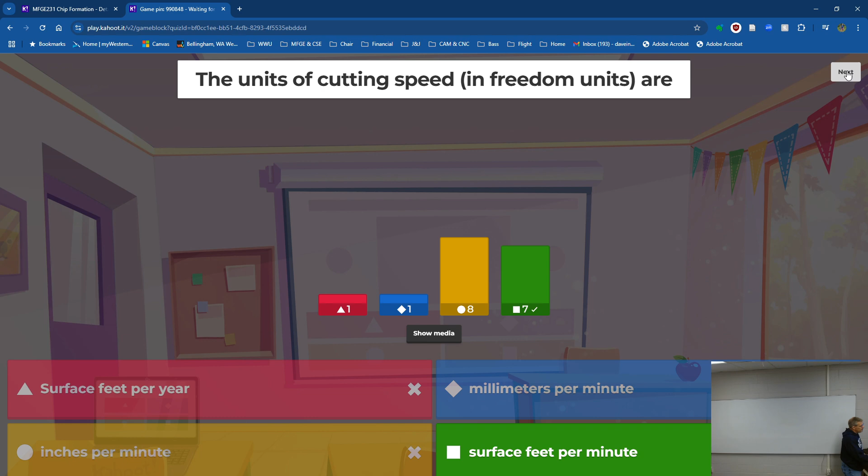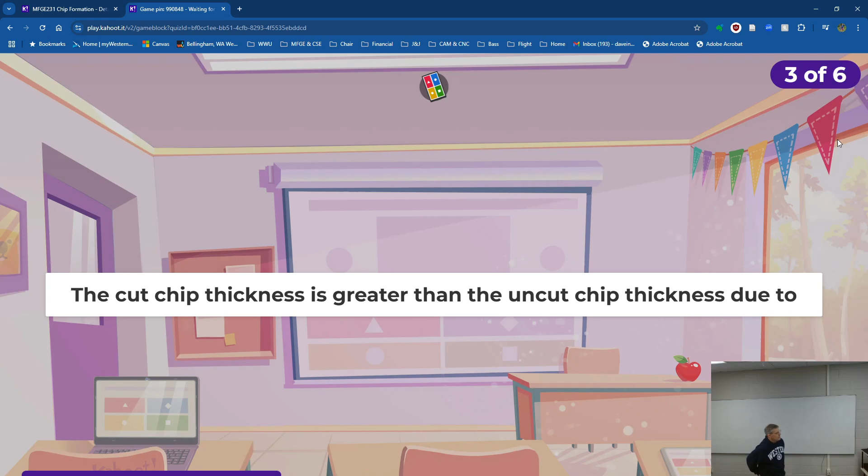I just know it's got to be constancy of volume. Excellent. Constancy of volume and friction. Good job, most everybody got there. Stress and shear angle is not a terrible answer, but not the best answer.

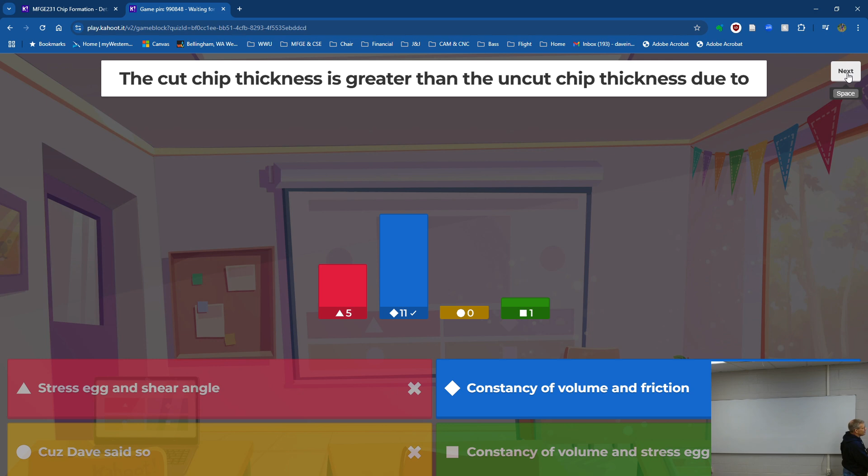In one way, they're not super related, but they all have exactly the same resultant, which is the important thing. They are all ways of trying to look at the resultant and to understand it differently.

All right, hanging on to a lead. False, for sure.

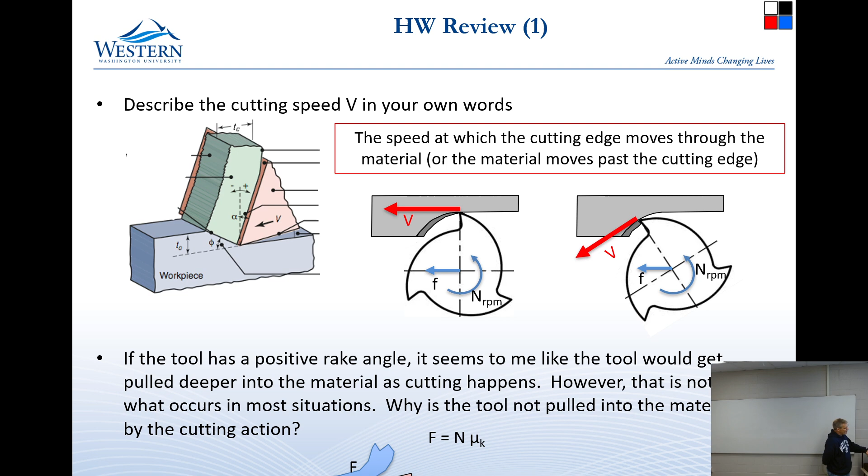That is excellent graphics, long after we needed them. But anyway, nice. Why is the shear plane important to machining, and how can we change it?

It's the plane across which all the work is being done. It's where the material is giving up, right here, and it is shearing across that area.

So how can we adjust it? If the shear plane is shorter, and you have the same amount of force, then there's more force being applied to that one area on the shear plane. So you might adjust parameters based on how long your shear plane is, so you don't end up with too much force on it.

Yes, but I don't like the word force there, that's a little bit not quite right. Does it have something to do with the amount of energy you're putting into cutting it? So I'm putting force onto this, and energy is force times distance. The force is kind of constant, not really, but we'll say it is for a moment. And if I stand this shear angle up so it is shorter, then I have force times a shorter distance, that's less energy into the workpiece, so that's less heat.

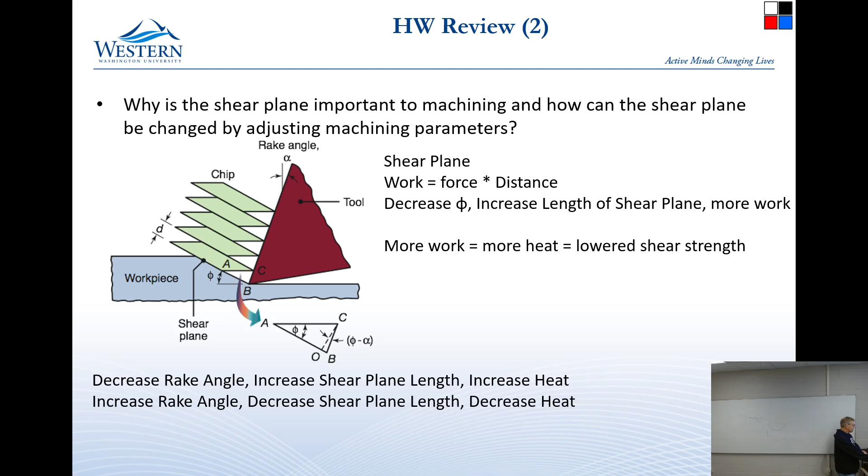All right. Nice. Words. Okay.

Merchant's force circle. Here is the point: there is a resultant force in a cutting process. The tool is either applying a force to the part, and the part is giving an equal and opposite force to the tool. So we have this resultant force, and we can break it up a lot of ways. That's the whole point of Merchant's force circle.

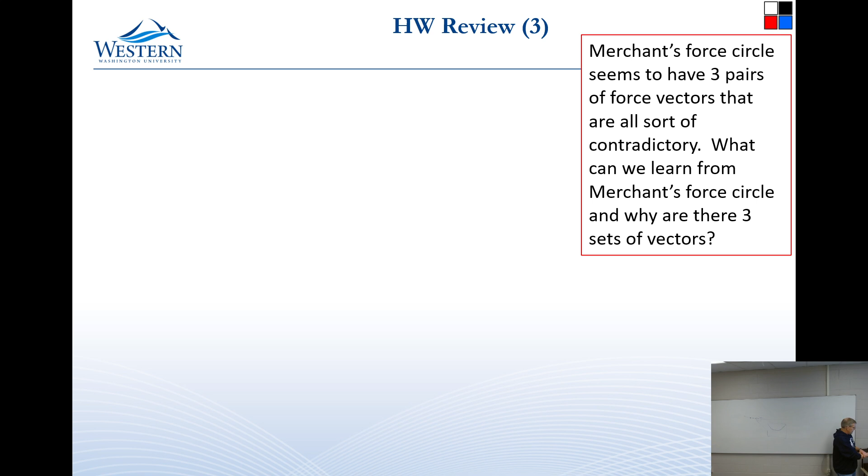So how might we break it up? Well, we can break it up into the cutting and thrust forces. The reason we use these is because they're convenient for machining. I have the tool, it is moving through the material, I set up the direction that it's moving through the material, I force that to happen, and so it's easy for me to think in terms of those axes. Other than that, they're not a particularly meaningful set of vectors to choose for this.

They don't have anything to do with the material. It's just that I can break it up into the cutting and thrust force, one pair of orthogonal vectors that sum to the resultant.

Now, it seems like the most useful or most meaningful pair, because this is where all the action is happening, would be the shear force and the normal to shear. But the problem is this changes all over the place. While I am cutting, there will be a little hard spot in the material, a soft spot in the material, the heat comes, the heat goes. It's constantly changing because the dynamics of the machining operation are constantly changing.

And until after the process, I have no idea what the shear angle was. We'll watch a video in a little bit where you can actually see the shear angle happening, but it is a terribly contrived thing to be able to see the shear angle occur. So that one is the most meaningful from a physics standpoint, but I can't actually tell what's going on during the process.

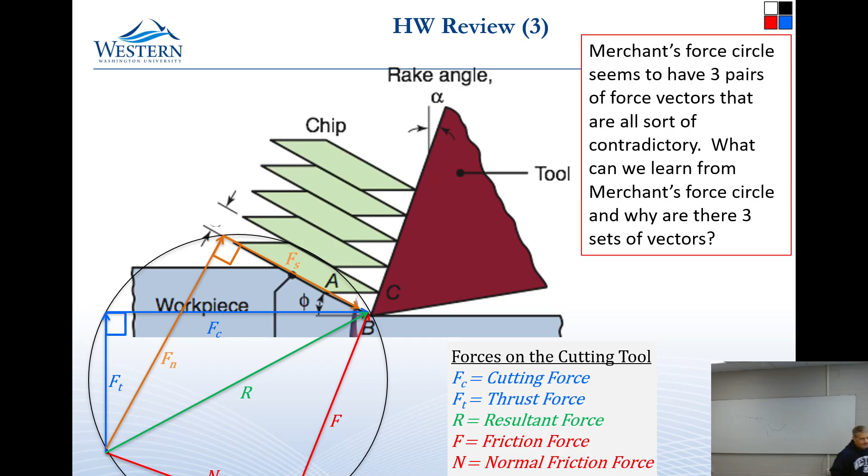So they're not unrelated, they're all the same resultant. So there's the shear force and the friction force, and those are not normal to each other? They are not normal to each other. It looks like they are in this drawing, which is a problem with the drawing, but when we watch it in a few minutes, you'll see that the shear angle changes all over the place, and we don't know that they're normal to each other. Gotcha, so we can't assume. We cannot. That would be nice. Darn physics. Never doing what we need.

All right, units of cutting speed: surface feet per minute. It is a funny set of units, very odd. But the numbers are huge—we'll be talking about something with 1,000 surface feet per minute. And that's feet, while all the other things are measured in inches or millimeters. So this one is a massive number in comparison with the others.

And that's why I said the other day that there's this weird intersection of things happening, and that is machining and nuclear explosions. It's because machining is happening so fast, it is deforming the material at this mind-numbing rate compared to other ways that we do anything with materials.

You can also get it if you're firing artillery at something. That's actually how you do these tests, with a thing called a gas gun. You take a little chunk of material that's very hard, and the material you want to test, and put it in a big long potato cannon - a scientific potato cannon, not the kind you spray hairspray in the back and light off with a barbecue lighter. This is a lot more specific than that.

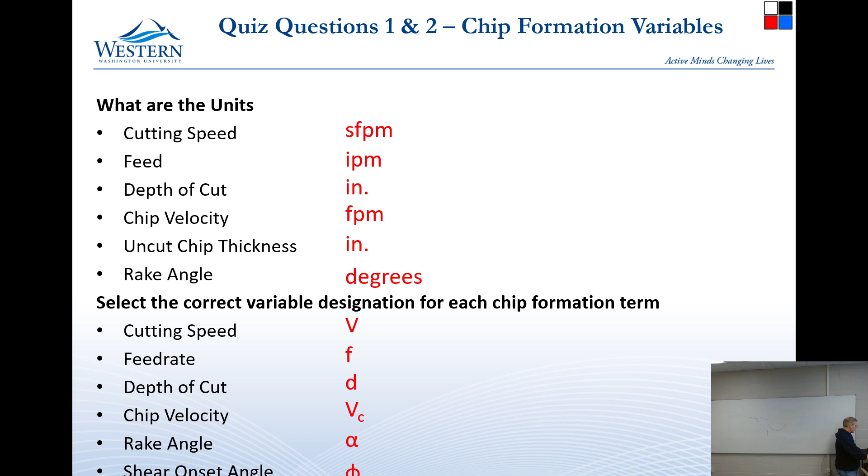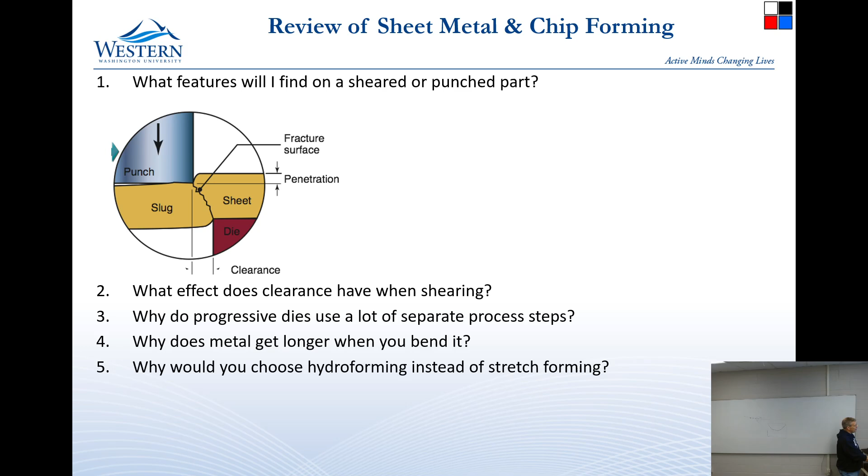Okay, so these are the things that we are setting and thinking about in our process. This question is about the lab today, so we can't say what we changed today because it hasn't happened yet. We're talking about that later.

That's important to know - positive, negative, and neutral rakes. That's like excellent work, right? Did you draw this? Of course I did - sweet graphics work right there. It is, I know.

You can't just find this kind of stuff on the internet. You have to make bad stuff like this. I'm sorry, I didn't recognize your artistry. Yeah, I remember how I did that.

Anyway, what is the difference between cutting speed and feed rate in an actual cutting process?

Yeah, your feed rate moves with your spindle speed and everything like that, because it has to be within a set parameter of chip load. Okay, so it is within a set parameter of chip load. We're determining how thick a chip we can take without overwhelming our machine.

But they seem really similar in a way. It's easy to get this confused, and the reason is because the directions sort of change on things. So I forgot my giant blue foam tool. That is terrible. But anyway, you should always have an end mill in every box that you carry around.

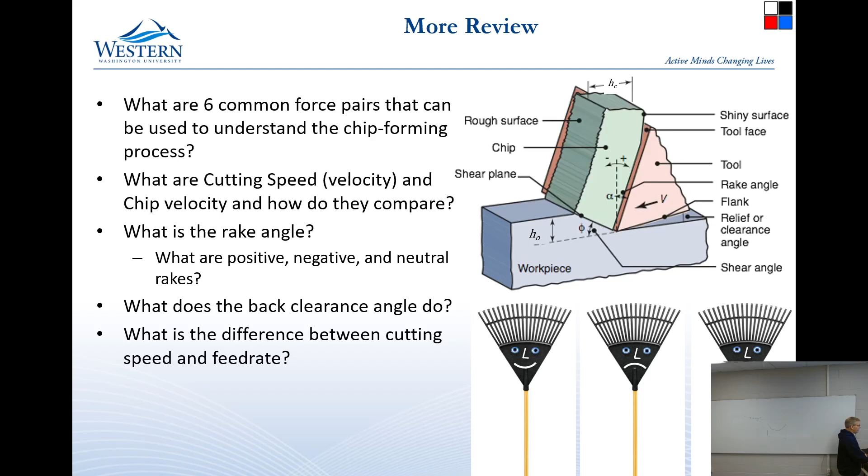If you look on the charts, that's too fast. It's okay, they'll all be fine. Nobody will die. So we get to watch a cool video.

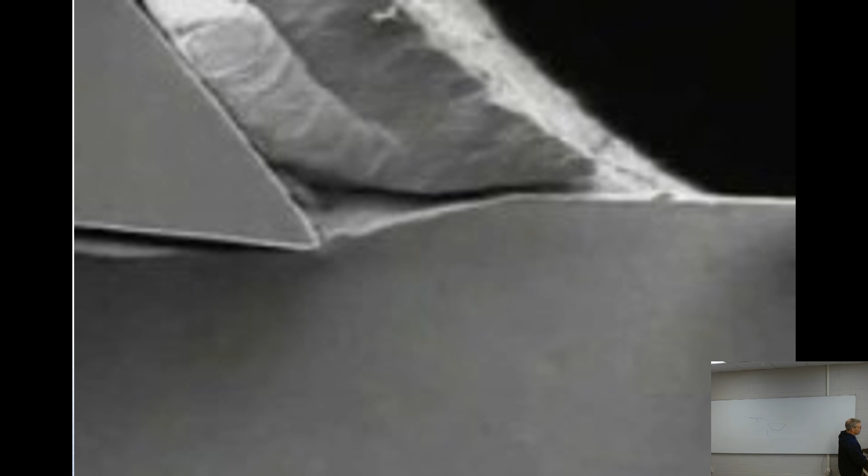We're actually going to watch it bigger. So, hey, stop. I said stop. Boy, you try to raise these computers well, and they just turn on you.

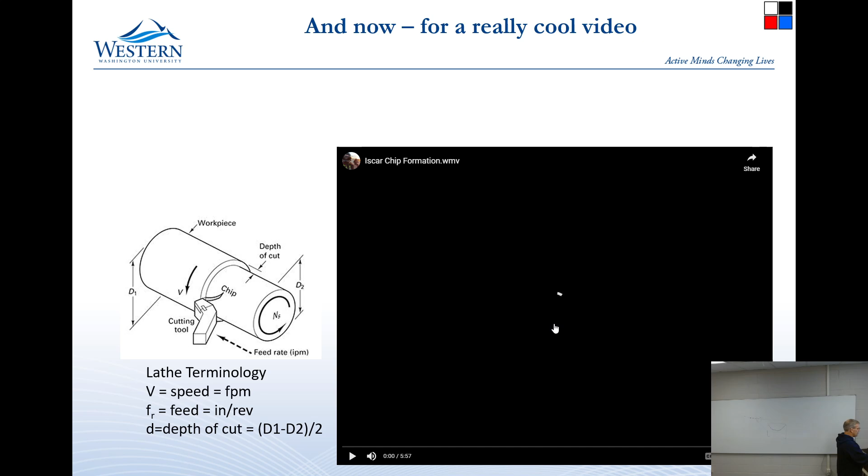All right, so just to understand what's happening here. Now I've confused it. All right, what is happening? We are acting like this is a lathe tool, and we have the material turning, and we are generating a chip right here as the tool comes, or the material comes across the tool and creates a chip.

Now that's not what actually is happening, because inside a scanning electron microscope, you can't make something spin very easily or very quickly. So what is actually happening is there is material, and it is being pushed through on a stage. Somebody's sitting there pushing the button on the stage, trying to feed it as fast as they possibly can, which if you've used the SEM is not very fast. And there's a tool mounted in there.

Now the thing that's been weird about this is that they took this piece of material and they polished the edge of it. You can tell they polished the edge because you can see some individual grains here, and a collection of some interstitials around the edge of the grains, which is kind of cool to see. And then they are running this tool through here, and it is kind of halfway sticking out of the part so that we can watch it.

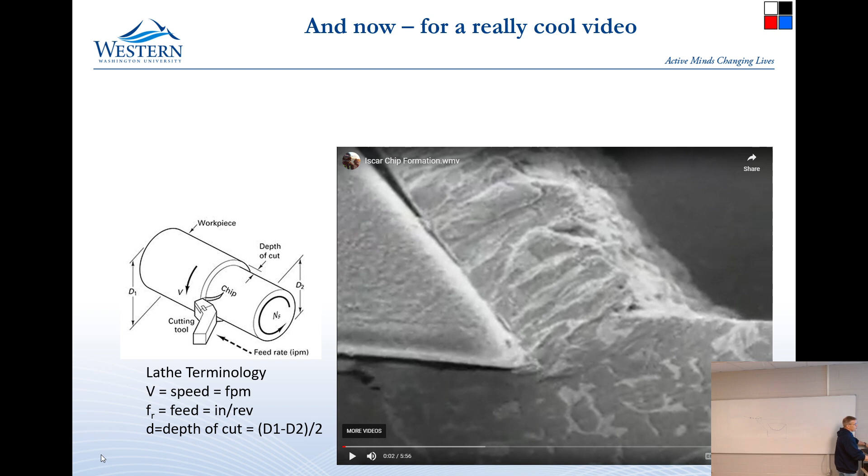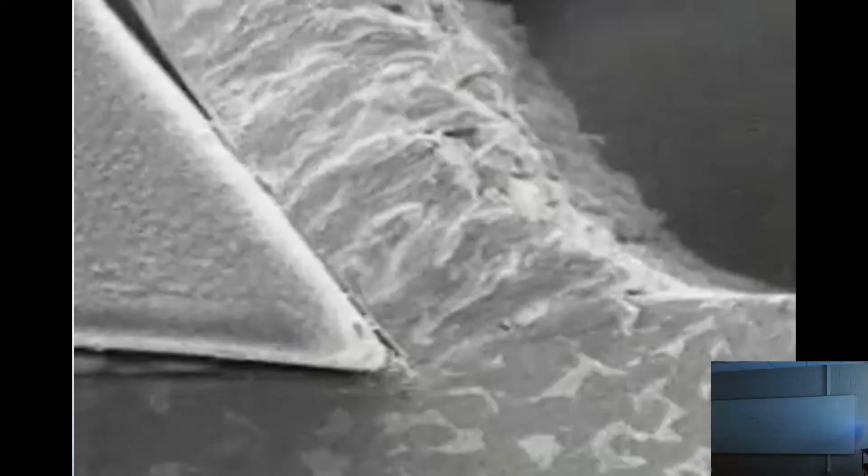All right, oops, sorry. Okay, so look along here. You can see the shear plane happening, and you can see that it varies some. It will be up here, and then it will go down here. Notice also what's happening at the tip of the tool: there's some material that's getting welded onto the tip of the tool.

And if we look at the tip, well, no, can't do that yet. You'll look at the tip later. One of the problems with built up edge is that the more it gets built up, it will sort of create a negative rake angle for machining the material.

Let's pause this for a minute, just because it's cool. So pretty sweet, right? You can see the shear events that happen. The material built up stress, and then it sheared along the plane, and it sheared over. Look at the difference between the uncut chip thickness, which is sort of like this, and the cut chip thickness, which is huge, massive. Pretty cool, pretty neat.

What else do we see? See anything else in there worth noting? So this is an uncoated tool. It's a high-speed steel tool, so should be fairly slippery. And you can actually make high-speed steel tools sharper than you can carbide tools, but we will use carbide mostly because they can go much faster.

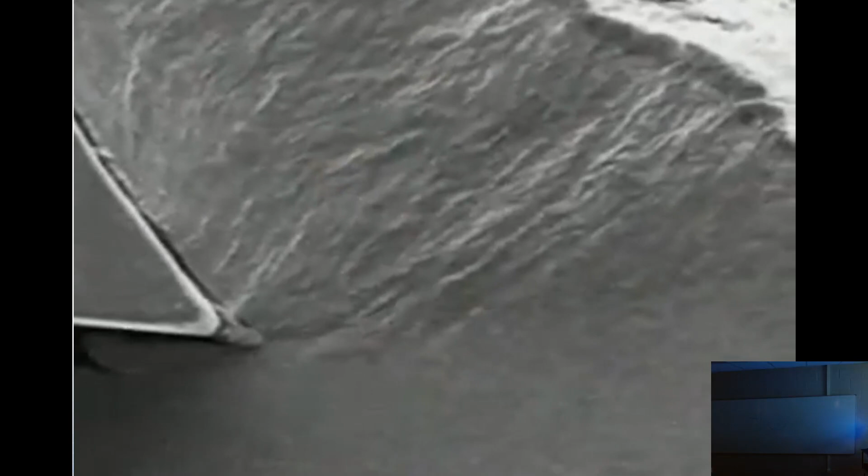So it's all looking good, and then, oh, look at these things. So that difference in height right there is surface roughness that comes out because of having the rake angle not be correct. So that's causing material to build up on this edge. It's also somewhat because this cutting process is so slow compared to what a cutting process ought to be, that the chip dynamics are kind of wacky.

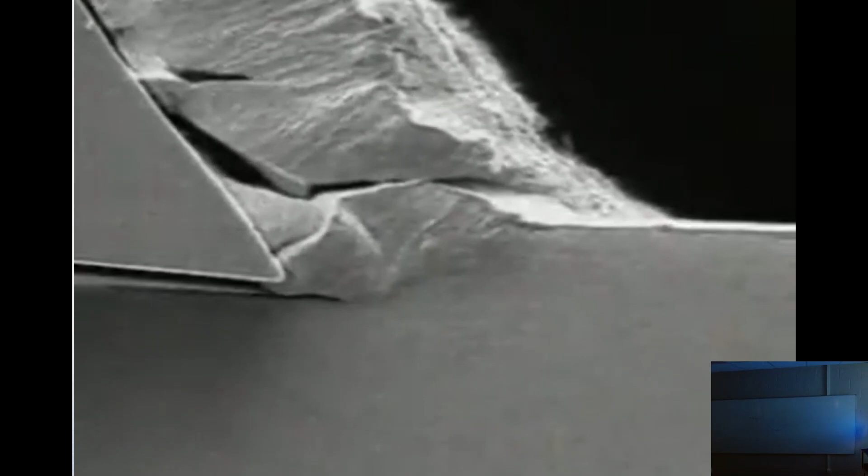Oh, that looks bad. It's going to be hard to recover from this one. We can look at the chips afterwards, and we'll look at chips in the next class. You can look at this morphology, the shape of the chips, and you can tell things about the process. So this is becoming serrated chips almost, where the chips are separate, breaking into pieces that are separate from each other.

We've now formed a completely new tool. We're not even using the tool anymore. So the tool wear has gone to zero at the tip.

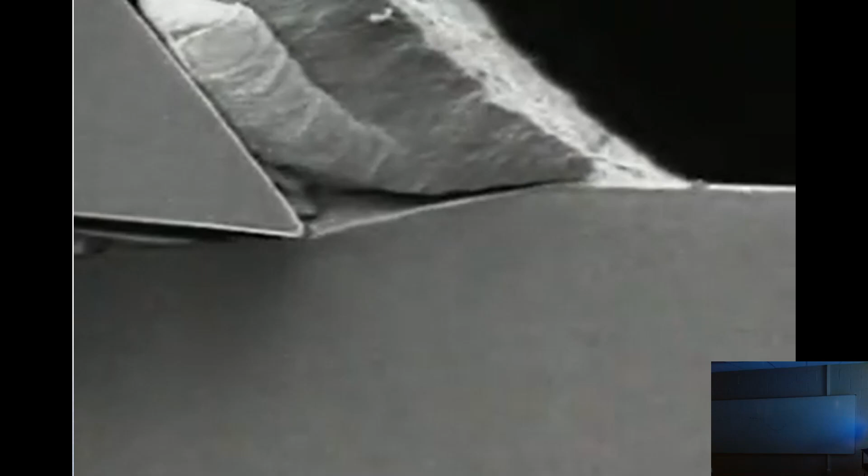Is that all welded? It is, but it'll break loose. Or is it like, where it makes like where it changes its height, is that buildup all welded, or is it just getting stuck under there? I would say it's hard to have a difference in definition. If it's stuck there, it's welded. So it's kind of a...

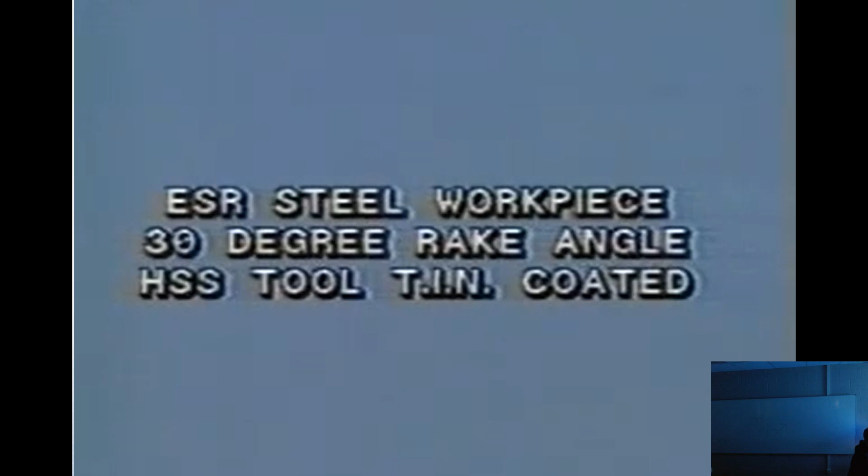Yeah, so this one, the tool has a coating on it. TiN is titanium nitride.

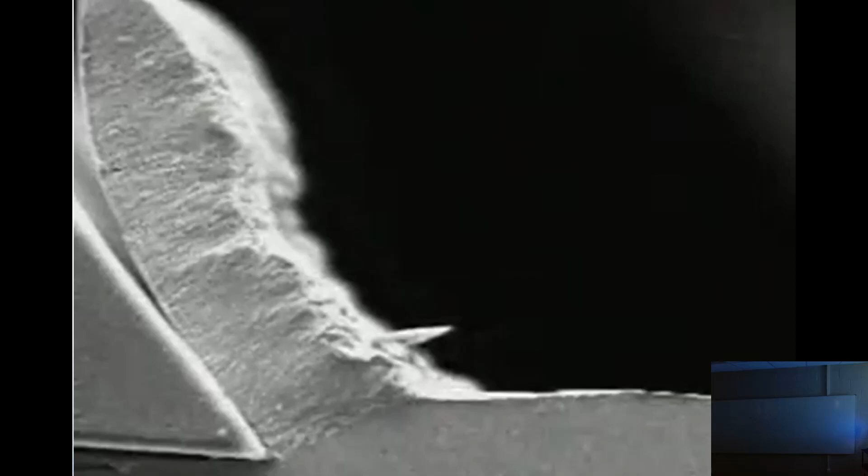Look how it rubs the tool right here. So there's high temperature right here as well as high temperature at the tip of the tool. If you have a good process, it will actually cause the material to bend away from the tool further up. What you want the chip to do is wrap around and hit itself in the back. When it hits itself in the back, it will break the chip loose. This is like a taffy experiment gone wrong.

This is way too much heat. Look how low the shear angle is going, way out from the edge. So we've got way too much heat in this process, and somewhat that's because the speed is all crazy on these. It's like plastic, it does look like plastic. We should call this plastic flow.

Perfect, good terminology. Unfortunately, no MERS were involved. No MERS.

What's happening? The tool's off to the left. It occasionally makes it into the picture. Why are they showing this? This is embarrassing, look how bad our tools are. Yeah, when operated at this speed in a vacuum, yes, they're not very good.

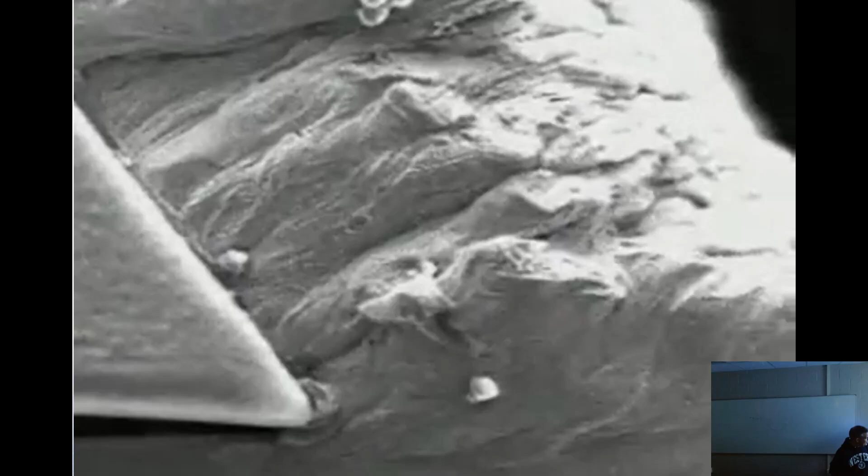Well, there's stuff in that one. There are, yeah, there are inclusions, which is part of machining - dealing with those inclusions. Because they'll hit a tool and break off the end, or all kinds of bad things.

A fish? I see it. Oh, swimming? Yeah, okay, I guess we can go with fish. Got a very pointy nose, this - well, fish. What do you see? I see a machine process, sorry.

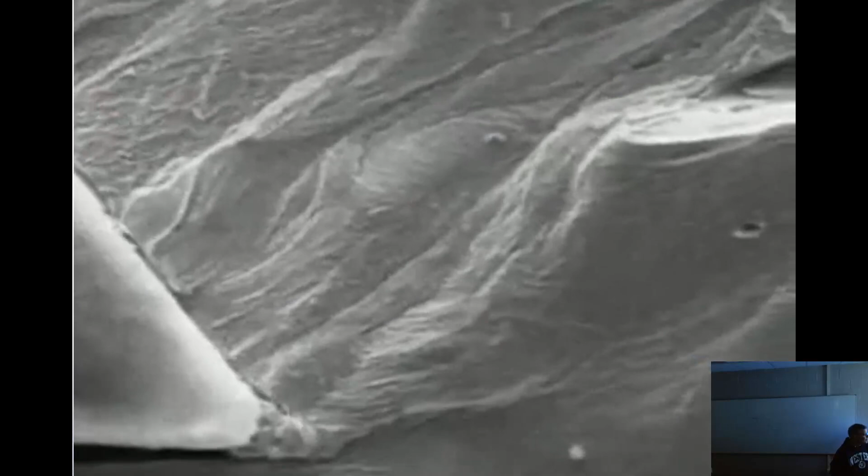Whoa, yeah, so you're gonna feel that on the surface. That would not be pretty on the surface of the material.

Right, here we go. Ooh, can we watch Microscopic Splinter? That one. By popular demand, we'll probably.

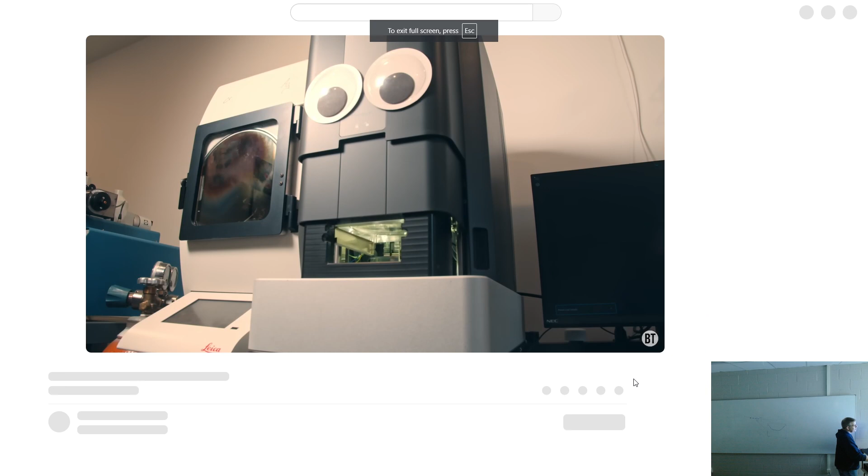I made this little widget, which is designed to cut metal, but it's designed to do that inside of a vacuum chamber of a scanning electron microscope, so that we can watch it happen in microscopic detail. And I have to tell you, this is some of the coolest footage I've seen in a long time.

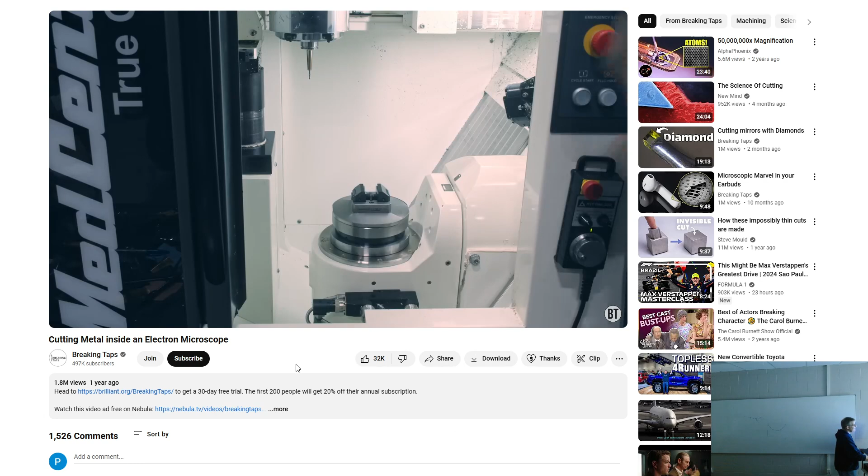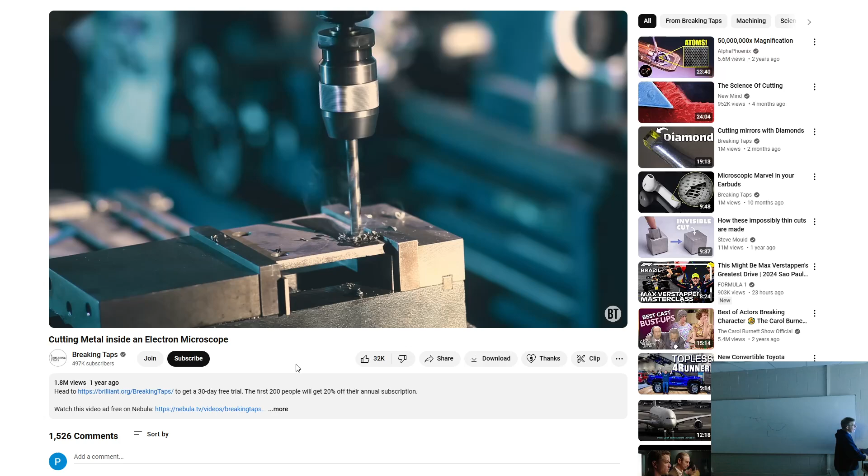Let's back up and talk about what's going on here. There are a lot of different ways to cut metal: small milling machines, fancy 5-axis CNCs, or even a drill press and hacksaw. Fundamentally, the principle is very simple. You take something harder than the metal, add a sharp edge to it, and push it through the metal. If everything goes well, you just cut some metal. Congrats! Of course, it's a little more complicated than that, but fundamentally, that's the idea.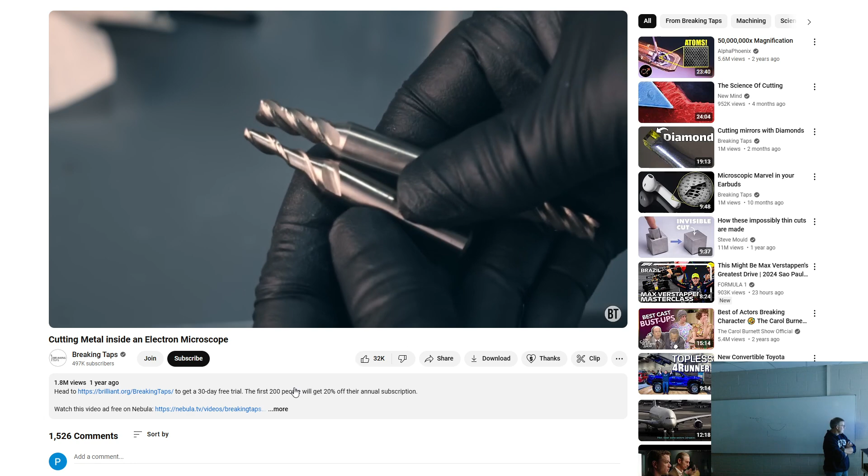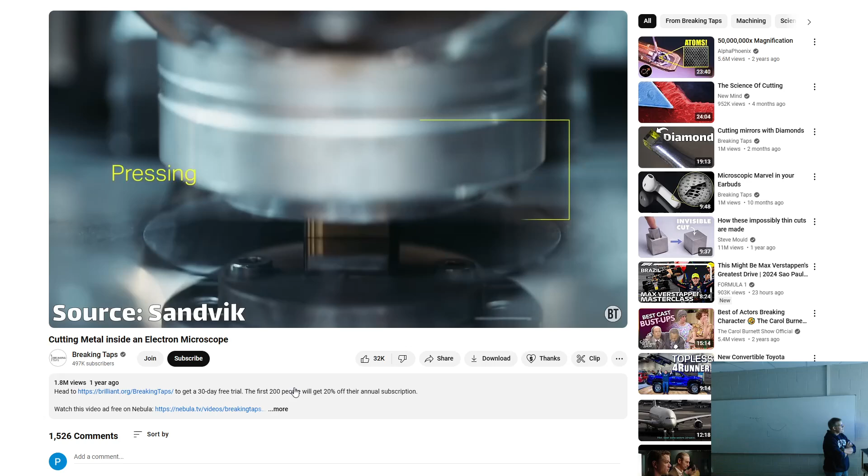Cutting tools were traditionally made of a hard metal called high-speed steel. It's an alloy that is harder than older carbon steels and lets you cut faster, hence the name high speed. But high-speed steel isn't generally used anymore because we have a better material called carbide. This is actually tungsten carbide powder mixed with cobalt binder. The powders are pressed together into a shape and then sintered. It makes a very hard tool that can keep a sharp edge.

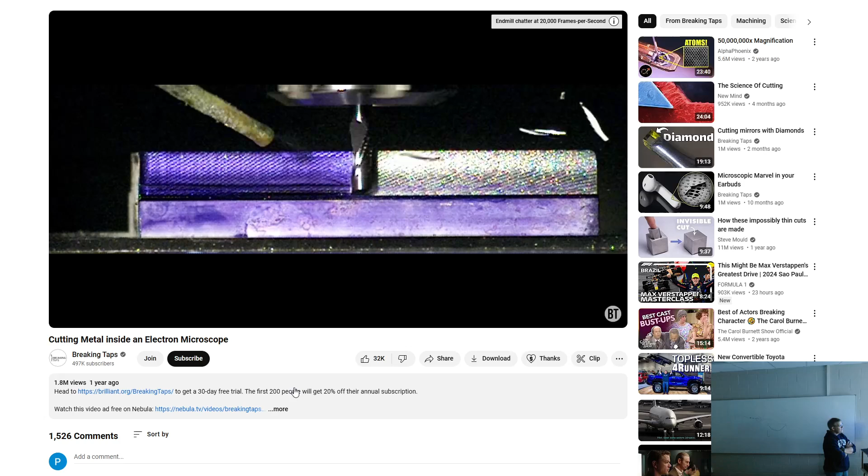Cutting tools come in all varieties, although the common form is a cylinder with sharp fluted edges. The sharp flutes cut the metal, and the space behind the flute helps remove the material from the cut and eject it. There are tons of variations of this - square edges or round edges, single flute or many flutes, super tiny or extra large, weird shapes, geometries that drill. Even though carbide is the most common, there are other materials too, like polycrystalline diamond or even single monocrystalline diamond. Sometimes the carbide is pressed into little shapes called inserts.

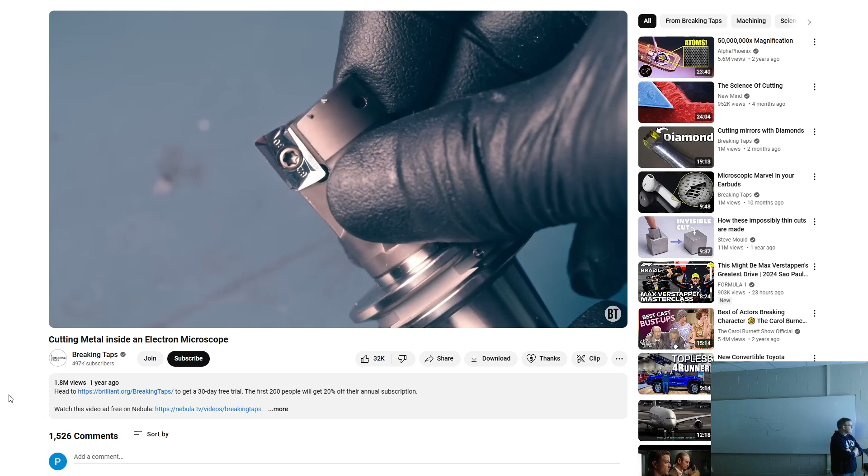That's what we're going to use today. These are 3 different cutting inserts, and you can see they all have slightly different shapes, coatings, and materials. These little differences can have a big impact on how they actually cut the metal. To help demonstrate this, I'm going to cut some clay using an improvised cutting device.

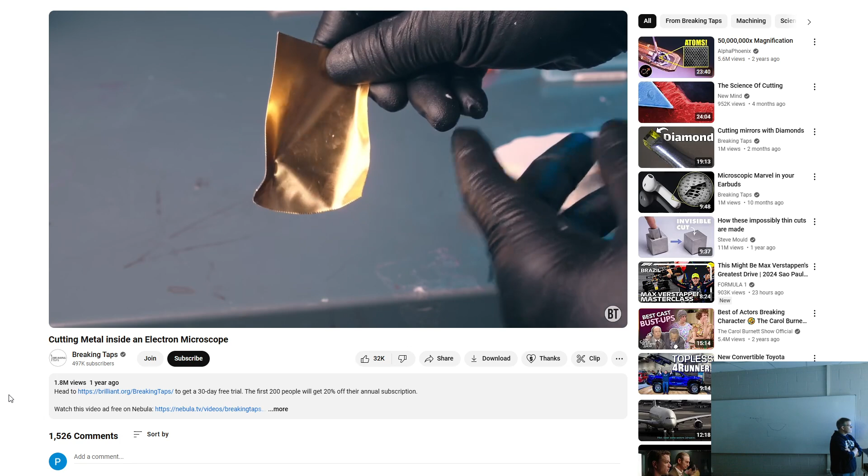It's just a piece of brass that I've bent into a specific shape. And while all these folds look random, they all serve a specific purpose. The cutting edge is down here at the bottom.

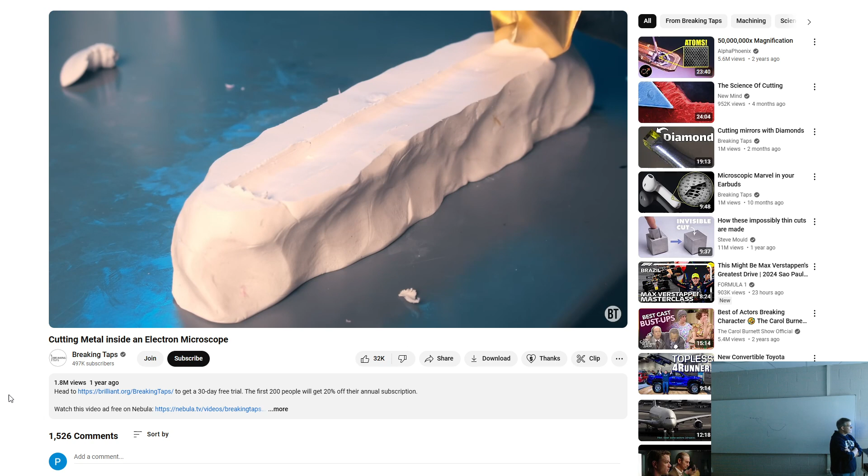So if I take this tool and push it through the clay, you can see the clay starts to pile up at the base, and once enough is accumulated, it starts to curl forward over top of itself. That's what those creases and folds are for. As the material gets pushed up the face of the cutting tool, the little bumps and creases push the material out and forward, making it curl back on itself.

This is a useful property because it helps get the material out of the way. You want it to form tight little curls that are easy to break off and don't get gummed up at the cutting edge.

If you have a tool with a flat cutting surface like this one, you can see the material just piles up on the face of the tool and doesn't really go anywhere. It kind of gets stuck. So those little bumps and creases are almost as important as the actual edge that's doing the cutting. There's a lot of finesse in the geometry of these cutting tools.

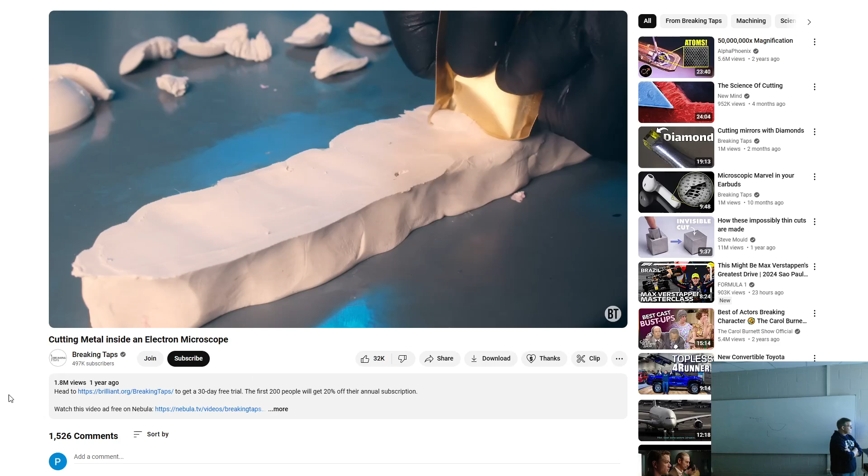I've always wanted to see this in action under a microscope, so we could watch the carbide cut real metal and watch all these features interact with the metal in real time. And I wanted to see it under a scanning electron microscope because, I don't know, how cool would that be?

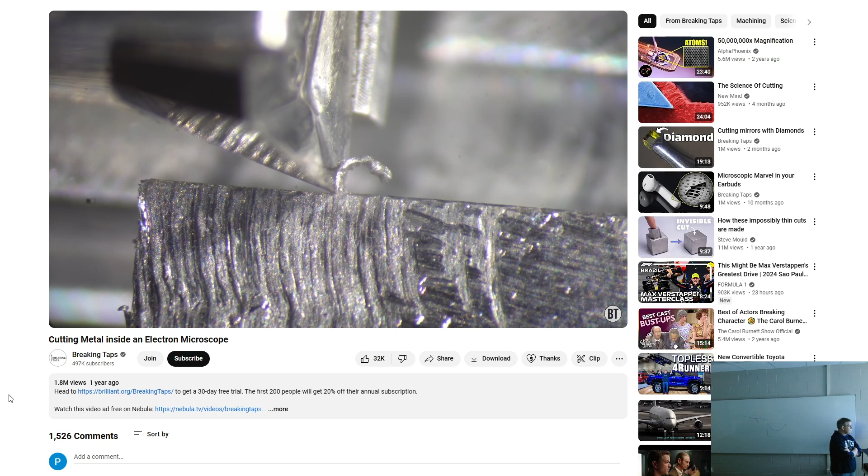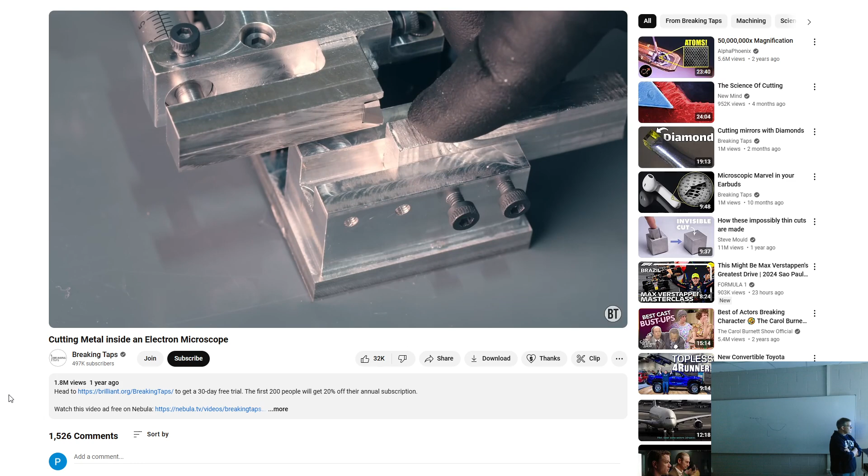So to do this, we need to make a little fixture to cut the metal inside of my microscope. This is what I came up with. It uses an off-the-shelf linear stage, which provides the cutting motion. That mounts onto a base, which also acts as a vise, holding our material to be cut. On top of the device is the holder for the carbide cutter, which also allows precise positioning so we can adjust the depth of cut.

Vacuum chambers are pretty picky about what goes into them. Most plastics and a lot of other materials will off-gas when you put them in a vacuum. So we need to clean all of our components really well by first degreasing in an ultrasonic bath of simple green, followed by some solvent.

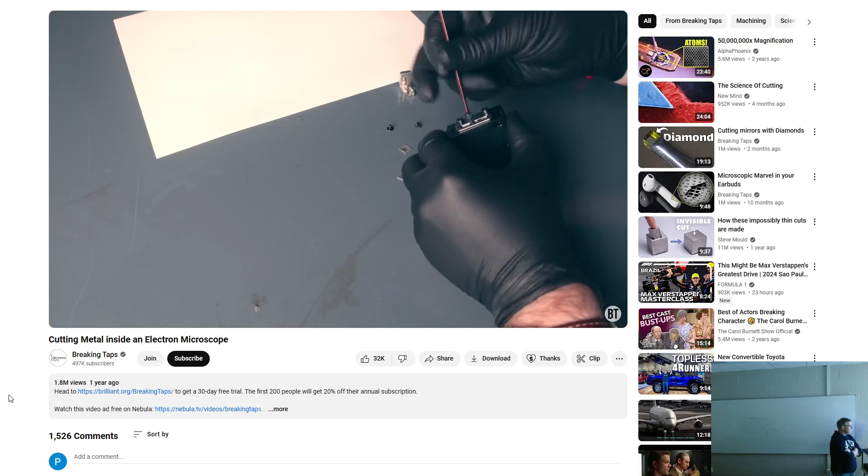The stage came with this green generic random grease, which I don't know what it is, but it's almost certainly not vacuum compatible. So we need to carefully make sure it's all been cleaned out and replace it with a vacuum-safe grease. I'm using Molykote, which is a high vacuum grease. I mostly use it for greasing O-ring seals, stuff that comes on and off of a chamber to make sure there's a good seal. But you can also use it for lubricating things that move back and forth.

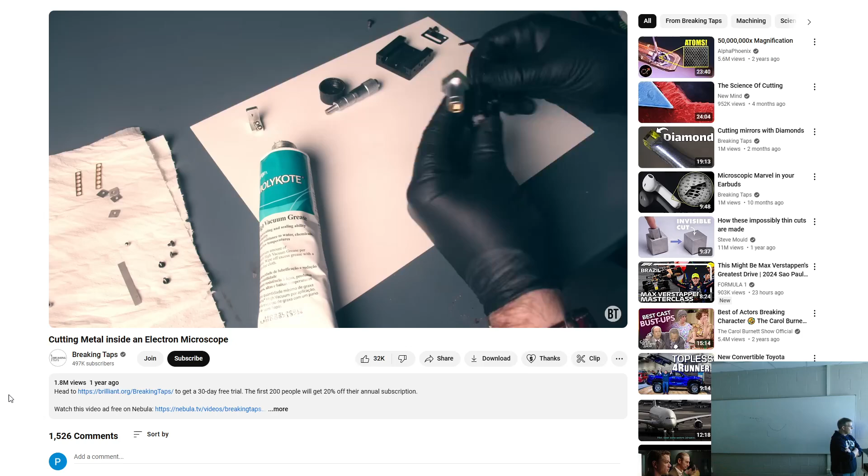Reassembling this stage took far longer than I'm honestly willing to admit on camera. So we're just going to fast forward through all of that process and start talking about how this actually works.

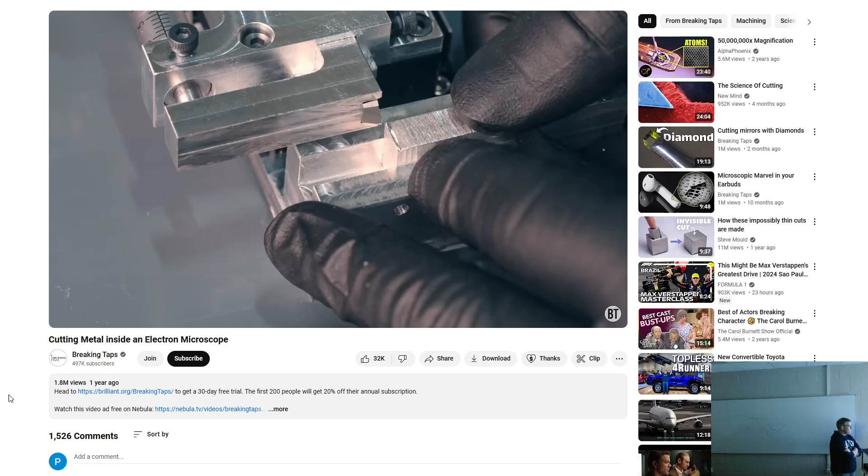First we mount the material to be cut - in this case, just a small piece of aluminum. Then we position the cutter with the help of a microscope. Finally, we advance the cutter 5 ticks on the micrometer, which moves the cutter forward about 50 microns. Because we're advancing this by hand with a little micrometer screw, we need to take a relatively shallow cut. In this case, I was aiming for between 100 and 200 microns, or about 0.2 millimeters.

Then we pop it into the scanning electron microscope, pump down the vacuum chamber, position the image, focus, and finally take a photo. Then we pull it out and repeat the process, moving forward another 50 microns.

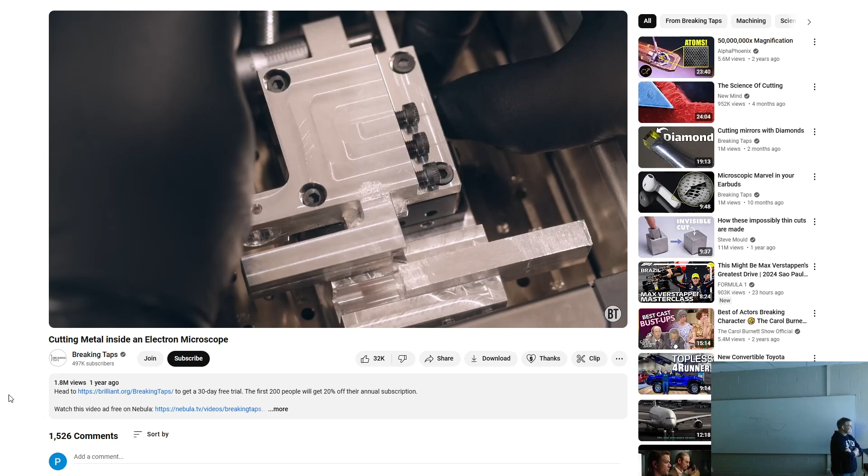I don't really know why, but I didn't think this would take too long. I knew it would take a little while taking it in and out of the microscope, but I assumed it'd be like an hour or two and I'd be done. I was very wrong. This takes about 5 minutes from putting it in the chamber to pulling it back out and repositioning. And I took about 70 photos, so you can do the math. I was here for a little while.

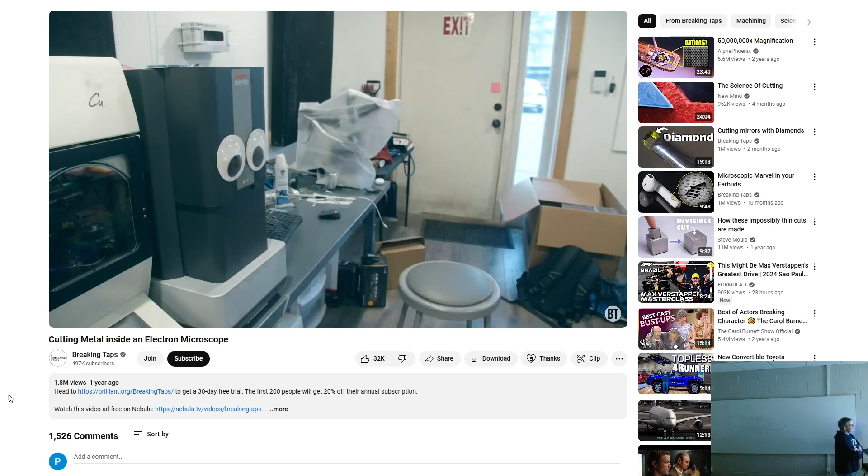But honestly, I'm not even mad about it. It was totally worth it. I mean, how cool is this?

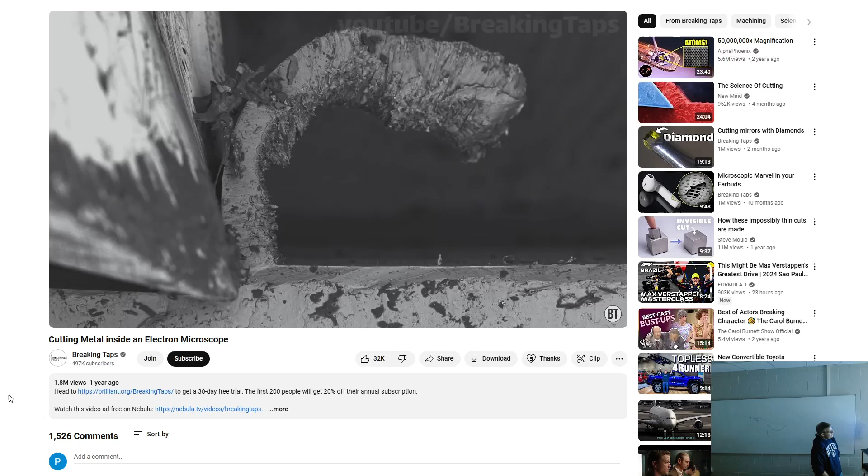If you look closely and watch these stripes in the material, you can see how the aluminum gets stacked on top of itself. You'd think it'd be like peeling a vegetable, where the skin comes off in one long continuous strip. But it's actually a lot more like that clay demonstration, as the cutter advances, layers get piled on top of each other.

The area where this is happening is called the primary shear zone, and it lays in sort of a diagonal to the cutting edge. There's also a secondary shear zone, which is all the metal that gets pushed up against the cutter's face.

These areas are of particular importance to researchers because they have altered material properties compared to the bulk metal. As the cutter is moving through the metal, it's displacing and shearing atoms in the lattice of the metal in those two different zones, so you end up getting different arrangements of the metal after it's been cut.

The way that the shear zones interact with the cutter can be pretty important and change how the cutter performs. As the cut progresses, you can see that the backside where it's being cut gets cleaner and sharper, and then eventually the whole chip starts to curl over itself, which is basically those chip breakers in action.

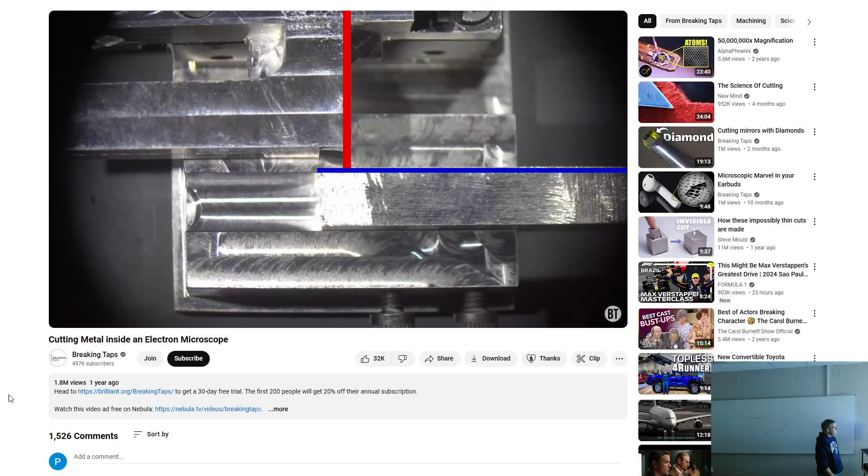I have the cutting tool positioned basically perpendicular to the surface, which is known as a neutral rake angle. You can also have positive and negative angles, which will affect how it cuts the metal.

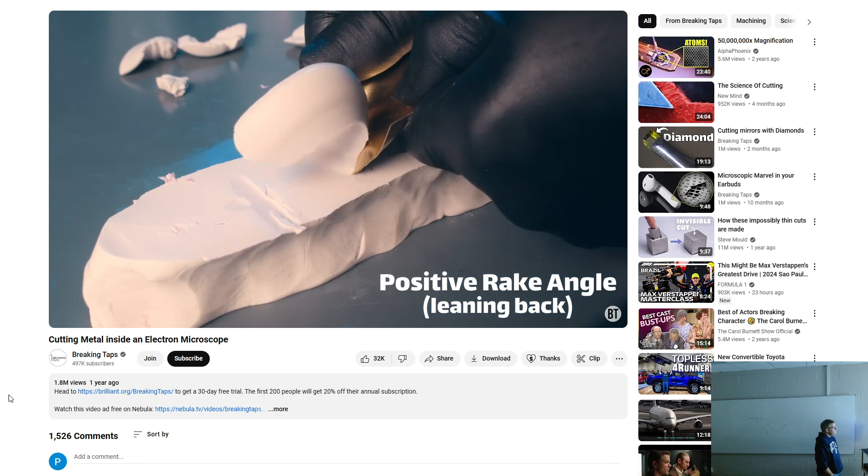If we go back to the clay, you can see that a positive angle has a pretty dramatic effect, causing the clay to curl a whole bunch compared to before. In contrast, a negative angle just sort of smooshes it into the clay itself and causes it to pile up at the base. There's no right or wrong angle.

The rake angle that's chosen is often dependent on the material. Different types of materials and their properties, how hard or soft or gummy they are, will dictate what sort of rake angle you should be using.

I really wanted to show the impact of the different angles and how it affects different materials, aluminum, stainless, carbon steel, but I couldn't do any more 7-hour imaging sessions. I just didn't have it in me.

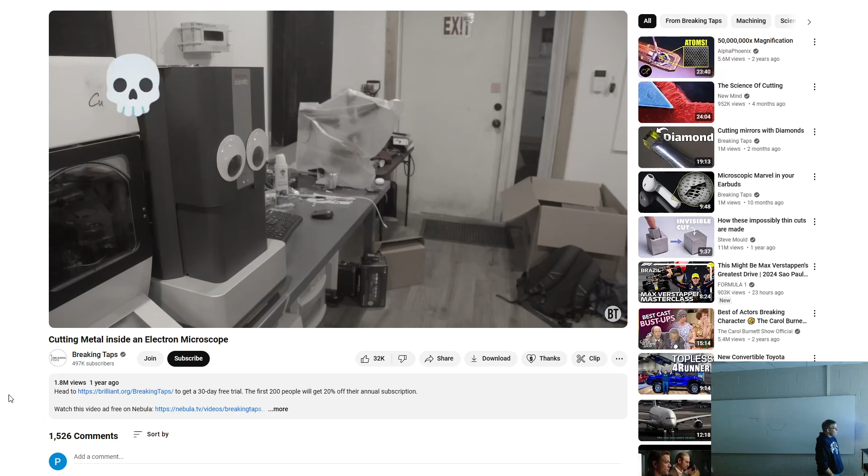You can buy chambers for my microscope that have an electrical pass-through connection, so in theory I could rig up some sort of stepper motor to move the cutter forward and automate the whole process for me. But to be honest, those chambers are sort of unreasonably expensive for what they are, like several thousand dollars for basically an empty box, and I had a hard time justifying it for a project like this.

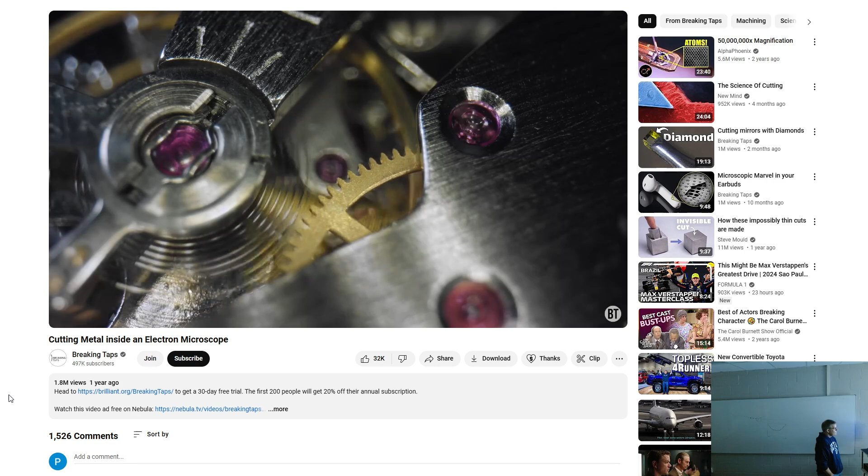If someone from Thermo is watching this and wants to send me one, I'm all ears, shoot me a message. But otherwise I think what I might do is make some sort of mechanical clockwork wind-up mechanism and use that to drive the cutter forward. The idea would be you wind it up ahead of time, put it inside the chamber, start imaging quickly, and it just will cut as long as that clockwork spring is giving it energy.

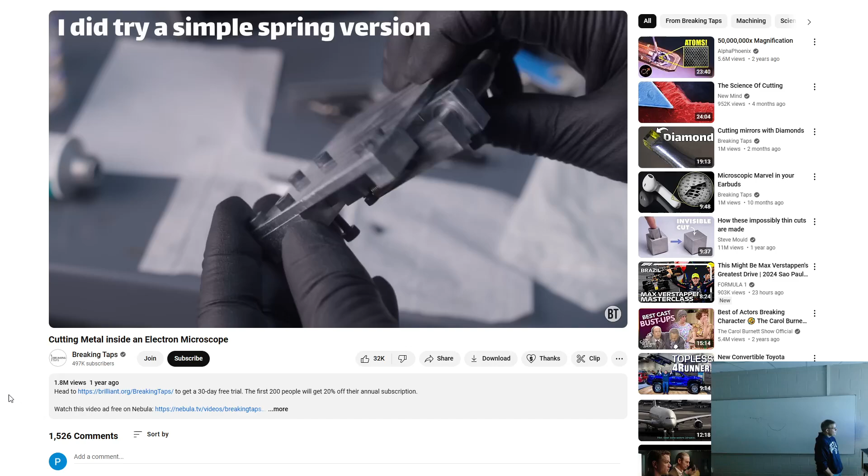That would take a pretty significant amount of CAD work on my side, so I think I'm going to bump that to the future. It might surprise folks given the nature of my channel, but my background and training is actually in biology.

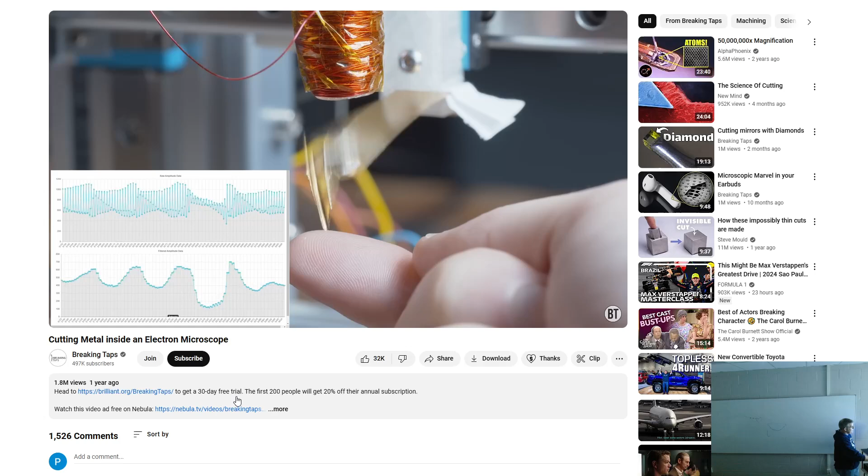Although I've spent the better part of my career working in software, specifically on distributed search and analytics algorithms. That's why you often see software adjacent projects on this channel, or some type of analysis of the data that's being collected. In the MEMS video, for example, I wrote a Python script.

All right, thanks buddy, enough of you. More of his videos, please. Yeah, there are really, really good videos on breaking taps. Does a great job of them, so you should watch them. What am I trying to get? Were you going to show us that video anyway? No. Oh, you folks just wanted it and it seemed like a good video. Move over.

Oh, it's break time. Okay, so I don't know, like 53, 54, something like that.